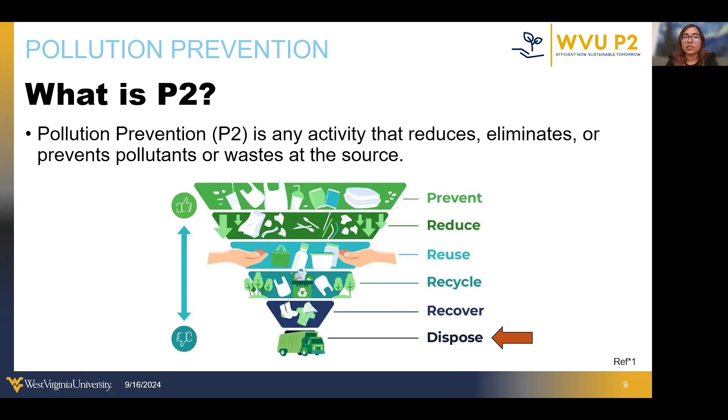When we talk about redesigning products as a method of pollution prevention, we are focusing on ways to fundamentally alter the design of a product to minimize waste and environmental impact. This can be achieved through several strategies. First, let's consider reducing material use in packaging. For example, in the food and beverage industry, companies can redesign their packaging to use less material, whether that means using thinner plastics or more efficient shapes. This not only reduces the amount of waste generated, but also lowers the cost of the material.

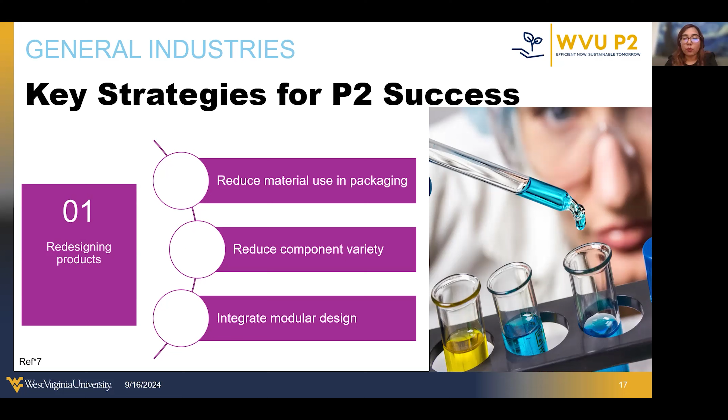For instance, in aerospace product and part manufacturing industry, companies can design parts that are modular, meaning they can be easily replaced or upgraded without needing to replace the entire product. This reduces waste and allows for more efficient use of materials over the product's life cycle.

Another crucial method for pollution prevention is choosing alternative input materials. This approach focuses on replacing conventional material with more sustainable and less harmful alternatives to reduce the environmental impact of manufacturing process. One example is to use alternative source of energy to supplement the grid. Companies can integrate renewable energy sources like solar or wind power into their operation, which reduces their reliance on fossil fuels, lowers greenhouse gas emissions, and can even reduce operational costs in the long term.

Another example is to use biodegradable materials. Companies can opt for packaging made from biodegradable materials instead of conventional plastics. This not only reduces the waste, but also minimizes the environmental impact when the packaging is finally discarded.

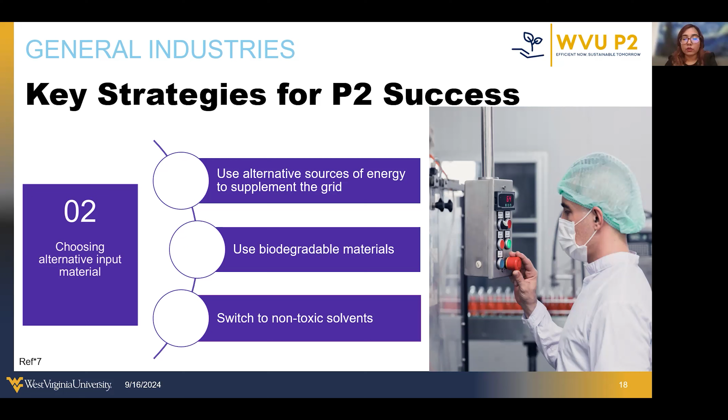And finally, switching to non-toxic solvent, which is another powerful strategy and can be heavily applicable in chemical manufacturing industry. Replacing traditional and hazardous solvent with non-toxic alternatives can significantly reduce the release of harmful chemicals into the environment and improve worker safety.

Another effective method of pollution prevention is switching to other equipment. This approach involves replacing or upgrading existing equipment with more efficient or environmentally friendly alternatives. One example is to install energy efficient motors. Upgrading to energy efficient motors can significantly reduce electricity consumption as it's a load driven device and lower greenhouse gas emissions. This not only helps with the environment, but also cuts down on energy cost for the company significantly.

Another example is to use airside economizer in HVAC system. This is relevant to any industry where climate control is crucial for maintaining the quality of the components. An airside economizer reduces the need for mechanical cooling by using the cooler outside air when conditions allow, leading to substantial energy savings.

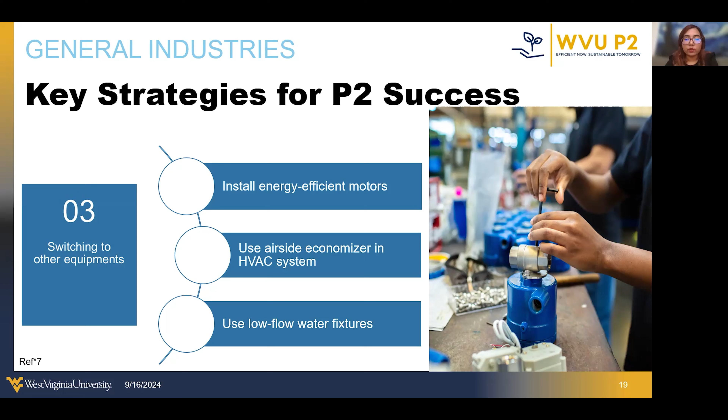And finally, using low-flow water fixtures is a simple yet effective way to reduce water usage, and this approach can be applied across various industries, including food and beverage manufacturing and processing. By reducing water flow, companies can lower their water bills and minimize their impact on local water resources.

Improving process monitoring is another key method of P2, and it involves closely tracking and managing the various processes within the facility to reduce waste and improve efficiency. One example is to implement continuous emission monitoring systems. CEMS can play a crucial role in tracking emissions in real time, allowing companies to quickly identify and address any issue that arises across the industries. This helps ensure compliance with environmental regulations and reduces the overall environmental impact.

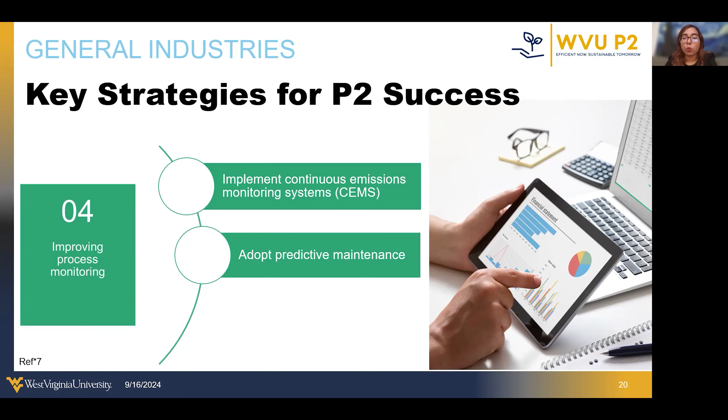Another example is to adopt predictive maintenance. This is particularly for many manufacturing industries. By using data and analytics to predict when equipment will need maintenance, companies can prevent unexpected breakdowns, reduce downtime, and avoid the waste associated with emergency repairs.

And lastly, regulating compressed air usage is a simple but effective way to improve efficiency. In automotive manufacturing, for example, compressed air systems are often a major source of energy consumption, and by carefully monitoring, regulating their usage, and assessing whether they're required or not, companies can reduce energy waste and lower operational cost.

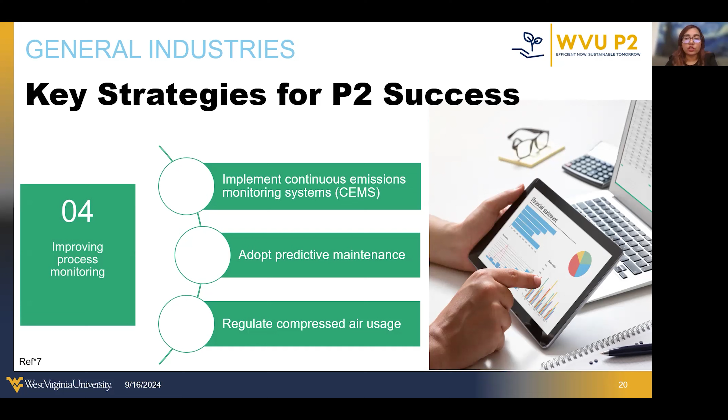And the last effective method for P2 is adjusting the concentration level of chemicals. This involves fine-tuning the amount of chemicals used in various processes to reduce waste and to minimize environmental impact. One example is to optimize chemical usage in cleaning process. Reducing the concentration of cleaning chemical can lead to less chemical waste, lower cost, and a reduced risk of harmful chemicals entering the environment.

Another example is to adjust the pesticide concentration in agriculture. Optimizing pesticide use can protect local ecosystems and water sources from contamination while still effectively managing pests. And finally, optimizing cooling water treatment is a crucial step in industries. By carefully controlling the concentration of treatment chemicals, companies can maintain the efficiency of their cooling system while minimizing chemical use and reducing the potential for environmental harm.

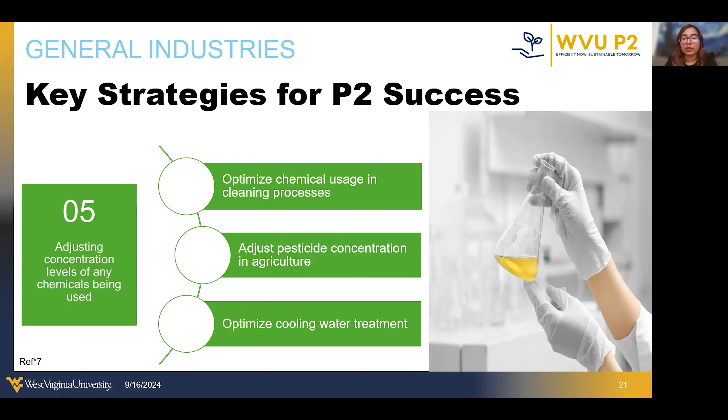While these methods I just described are key strategies for pollution prevention, it's important to remember that P2 is not limited to these approaches. Pollution prevention often requires us to think creatively and explore unconventional solutions. Sometimes the most effective strategies are the ones that aren't immediately obvious, and they might require us to challenge traditional thinking or to consider entirely new ways of doing things.

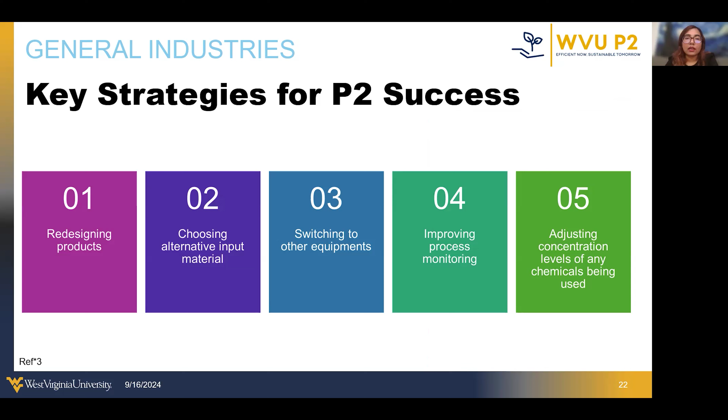But as many of you might find, it is impossible to connect all the dots this way. The solution only becomes clearer when we allow ourselves to break free from that conventional thinking, when we realize that nothing is stopping us from drawing the lines outside the perceived box. This is what we mean by thinking outside the box.

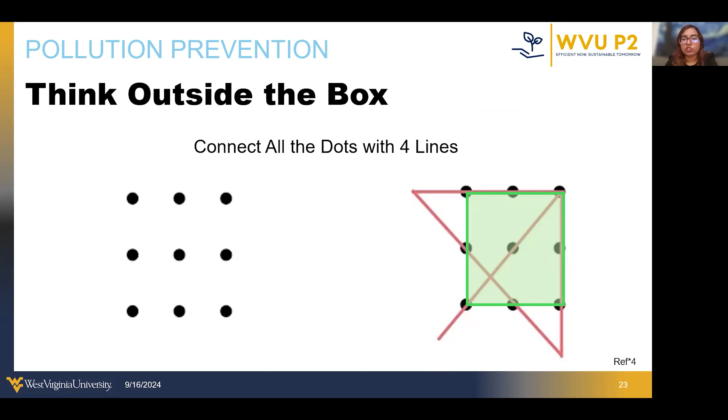And in pollution prevention, the most impactful solutions often require this kind of creative thinking. It is about pushing boundaries and challenging assumptions, finding innovative ways to reduce waste and minimize environmental impact. And now let me share with you a fascinating example of out-of-the-box thinking that truly embodies the spirit of P2.

In 2009, Google hired a team of 200 goats to mow the lawn at their Mountain View headquarters. Instead of using lawnmowers that emit pollution, Google decided to bring in these goats to graze and naturally trim the grass. Not only did this solution reduce emissions, but it also saved on fuel and maintenance costs associated with traditional lawn care equipment. Additionally, it provided natural fertilizer for the grounds and contributed to a healthier ecosystem.

Now let's briefly look over the 6 NEAs that have been prioritized by the P2 program before we jump into the NEA-specific recommendations or strategies. The first NEA is food and beverage manufacturing and processing. The second one is chemical manufacturing, processing, and formulation. Then we have automotive manufacturing and maintenance.

Next is aerospace product and parts manufacturing and maintenance. Then we have metal manufacturing and fabrication. And finally, we have supporting pollution prevention in Indian country and for Alaska Native villages.

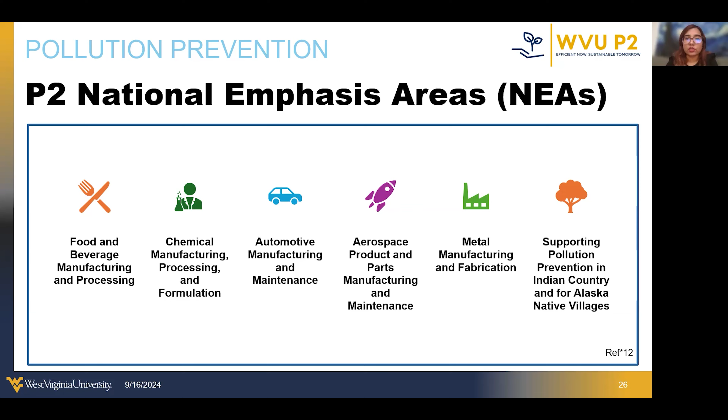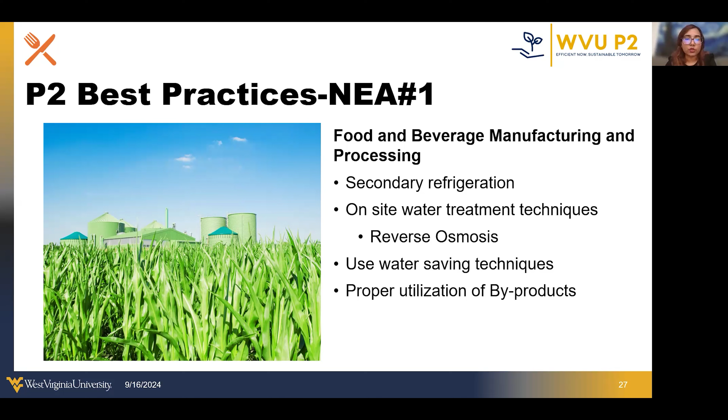So let's first jump into the P2 best practices for NEA 1, which is food and beverage manufacturing and processing. Here we have listed a few best practices, which we will explore and dive deeper into how they work and the benefits they bring to food and beverage manufacturing in the next few slides. But first, let's understand how important refrigeration is for the food and beverage industry.

Refrigeration is crucial for the food and beverage industry, which heavily relies on temperature control to ensure quality and safety. Here are 4 points we have listed on why it is so important for this particular NEA. The first is, in the food and beverage industry, maintaining controlled temperature is essential to extending the shelf life of perishable goods. Proper refrigeration helps prevent spoilage and contamination, ensuring products reach consumers safely and with optimal quality.

Many processes in food production, such as fermentation, chilling, and freezing, require precise temperature control. Effective refrigeration ensures that these processes occur within the correct parameters, safeguarding both product quality and safety. Given the energy-intensive nature of refrigeration in the industry, optimizing the systems can vastly improve overall operational efficiency.

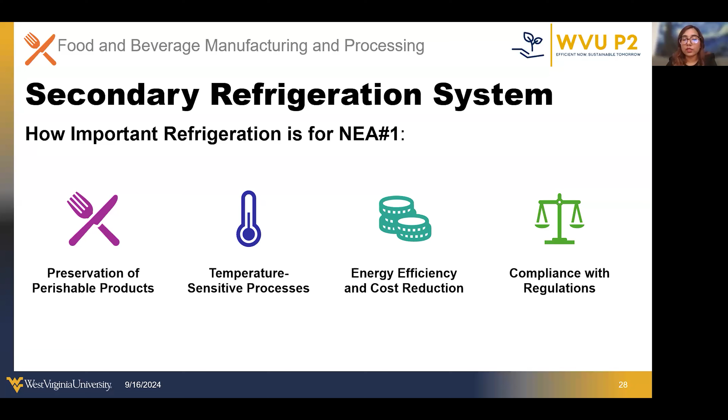And finally, food safety regulations require stringent temperature controls throughout the supply chain, and reliable refrigeration systems are key to meeting food safety standards, reducing the risk of non-compliance and ensuring consumers' safety. So one of the solutions is using a secondary refrigeration system, which is an effective solution to minimize the use of hazardous chemicals while maintaining a safe and efficient cooling process.

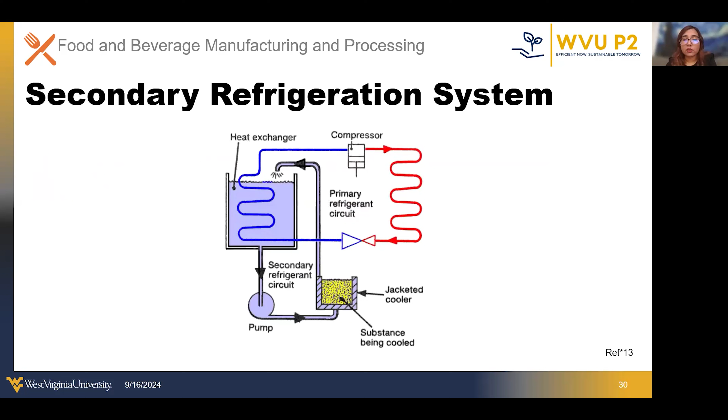So let's have a better look at how this process works. The process begins with the compressor, which circulates the primary refrigerant through the primary circuit, and the refrigerant cools down the heat exchanger. But here is a catch. This is risky because the primary refrigerant, such as ammonia, is toxic and can be dangerous if it leaks. Imagine an ammonia leak in a meat processing plant; this could result in product contamination, create a hazard for the workers, and cause significant downtime.

Primary systems also operate under high pressure, increasing the likelihood of leaks or equipment failure, which is something food and beverage processing companies must be cautious about given the stringent health regulations they face. Now, there comes the secondary refrigerant, which absorbs the cold from the heat exchanger and is distributed throughout the plant, cooling equipment and product efficiently.

The jacketed cooler you see there ensures that the target substance, whether it's a product or a piece of equipment, is cooled safely, preventing any contact with the primary, more hazardous refrigerant. So this is why a secondary refrigerant system is better: the primary refrigerant, like ammonia, is kept confined in a small controlled area of the plant, such as the machine room, and this means the hazardous chemicals are not spread throughout the production areas, reducing the risk and exposure.

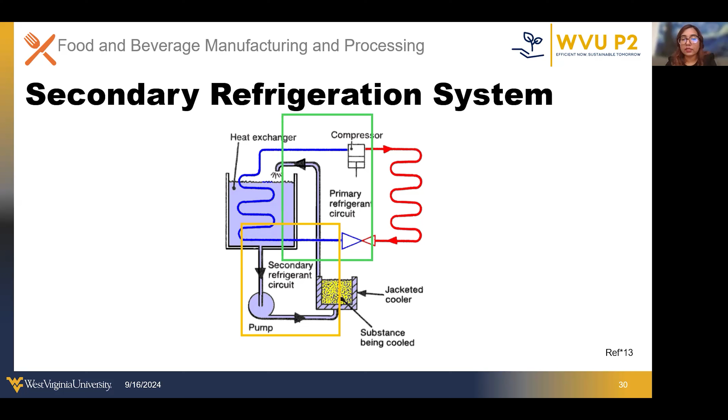So let's take a closer look at the benefits of using a secondary refrigeration system. First of all, it reduces harmful refrigerants, one of the key advantages of using this secondary refrigeration. Next, it improves safety, as we discussed in the previous slide: it can prevent spills through the storage, or prevent any contact with the workers or the food.

Next benefit is it is an isolated refrigerant, which is the design of the system ensures that the main refrigerant stays confined within a specific controlled area, which is usually the machine room and the condenser, while a safer secondary refrigeration circuit circulates throughout the plant.

And finally, it is cost effective. Not only does the system improve safety and efficiency, but it is also cost effective, as the safer operation leads to lower maintenance cost, and the reduced need for refrigerant top-ups minimizes ongoing operational expenses.

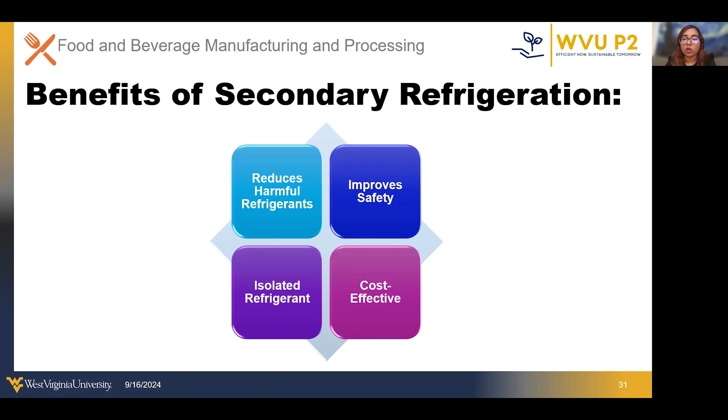All right, so now we will discuss another best practice that this particular industry can consider, which is on-site water treatment techniques. In a lot of these food processing companies or manufacturing units, boilers are essential in the food and beverage industry, providing steam for key processes like sterilizing equipment, pasteurizing products, and supporting cooking and cleaning operations, ensuring the boiler runs efficiently and helps maintain high production quality while minimizing energy consumption.

And one of the very important steps here is the makeup water, which is added to replace water lost during steam production, and plays a critical role in boiler efficiency. Maintaining high water quality is necessary to ensure the boiler operates effectively, avoids scale buildup and ensures consistent steam output.

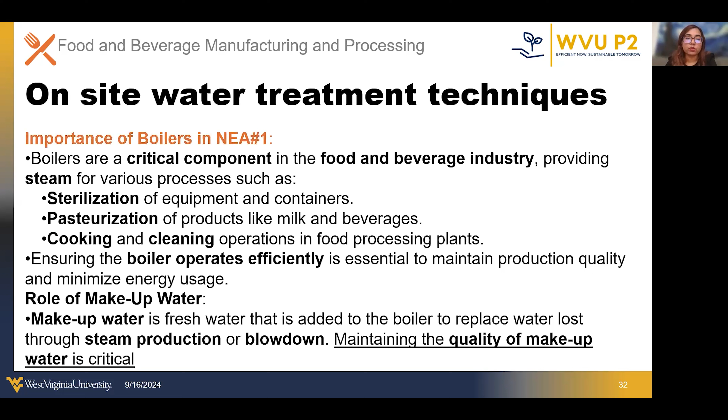Now, here is a closer look at reverse osmosis, which is an incredibly effective method for reducing total dissolved solids, or TDS, in boiler makeup water, especially in closed loop heating systems. So let's go over why this is a key practice in the food and beverage industry and how it works. Here is the diagram of reverse osmosis, and I will walk you through how RO works and then discuss how it directly benefits the makeup water used in the boiler system.

So the first step is, before water enters the RO system, it goes through a pre-treatment stage. Here, large contaminants like sediments, chlorine, and other impurities are removed to prevent clogging or damage to the RO membrane. This step ensures that the membrane can focus on filtering smaller and dissolved solids.

In the next step, as you can see here, the core of the RO process is the semi-permeable membrane, and water is pushed through this membrane under pressure. Water molecules pass through, leaving behind TDS, including salts, minerals and organic contaminants. The clean water that passes through is known as permeate, while the remaining water with concentrated impurities is called reject. So you might be thinking, what is this semi-permeable membrane and how does it work?

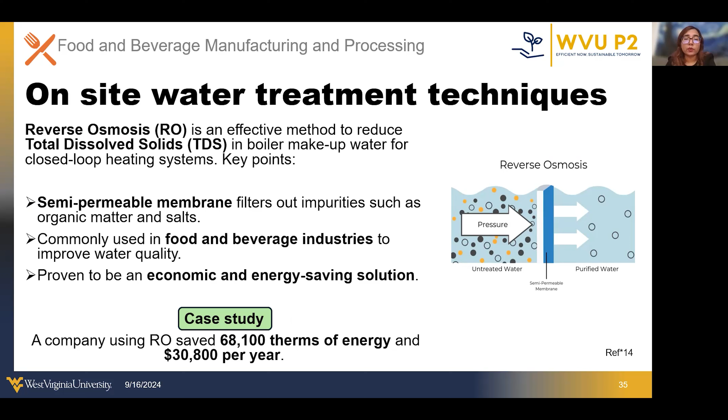So as you can see, RO is not only effective but also cost efficient, as it is an energy saving solution that can significantly reduce the operational cost of the boiler over time. For instance, in one case study, a company using RO technology saved an impressive 68,000 therms of energy and more than $30,000 per year. This demonstrates that beyond its environmental benefit, RO can also result in substantial financial savings, as it helps with the boiler makeup water, which helps to keep the boiler scale free.

And here are a few other techniques to save water in the facility, used throughout food and beverage manufacturing units or businesses. I'm not going over them one by one due to the shortage of time, but they include reuse of final rinse water, reuse of scrubber water, reuse of brine, considering low flow faucets and aerators, and regular inspection to keep an eye out for leakages and waterline spillage.

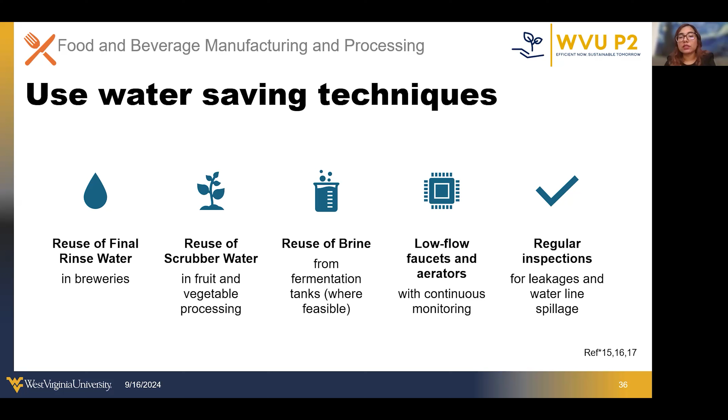Next, we have another recommendation for this particular industry, which is utilization of byproducts. We have listed many points here suggesting extracting valuable compounds from different byproducts, such as mango peels and tomato byproducts, looking for ways to convert food processing leftovers to repurpose them, such as animal feed, and looking for opportunities to partner with specialized industries to extract useful byproducts if in-house extraction or repurposing is not feasible. But here I want to slip in one of my personal experiences.

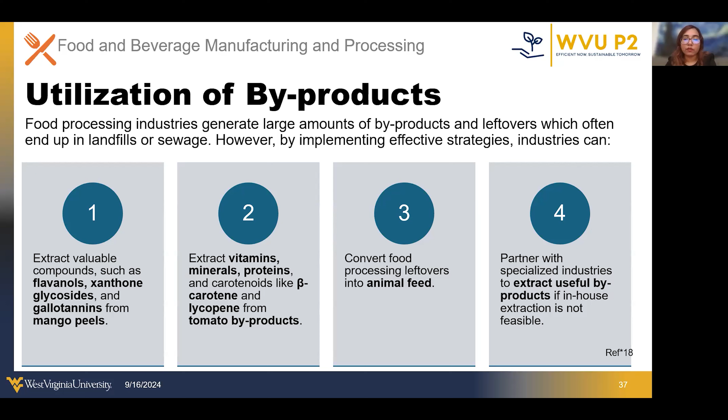This is when I was working with a manufacturing company, and we implemented a byproduct management strategy that truly revolutionized our production line. We were able to repurpose byproduct as an additive material in the production process, which ultimately replaced a significant amount of raw material. Not only did this save us a substantial amount of money, but it also contributed to the company's ESG goals by reducing waste and enhancing sustainability. It was a great example of how a smart, well-planned strategy can turn a challenge into a benefit.

And next, we will talk about our NEA2, which is chemical manufacturing, processing, and formulation industries. Here we will talk about the implementation of proper chemical storing practices and transfer plans, and how optimizing reaction conditions can help with reducing the release of toxic chemicals, very briefly.

So these are the list of some best practices, or the things we can keep an eye out for to ensure that we are doing proper chemical storing. So the first one is classifying and storing incompatible chemicals separately. And next, we can consider maintaining environmental conditions such as temperature and humidity. We should also label containers properly and replace damaged labels immediately if the situation occurs. And we should also consider storing unused chemicals in separate containers to avoid

contamination. And also, we encourage to perform routine checks of storage conditions and avoid exposure to sunlight, water leaks, and mechanical or electric shocks, because sometimes exposure to any of this can compromise the integrity of the chemicals, making them dangerous to handle or even causing hazardous reactions.

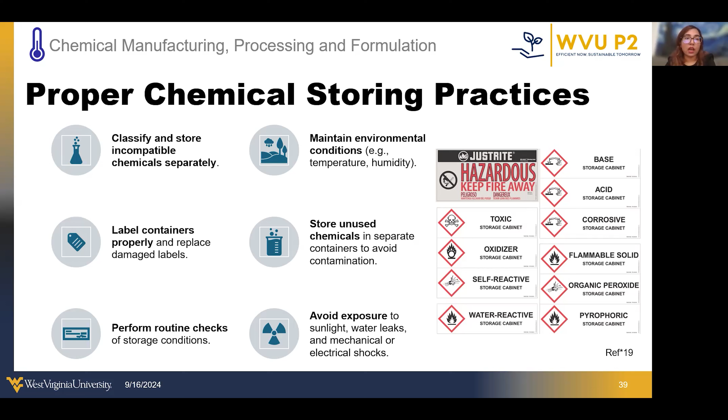Next, we have some suggestions for preparing proper chemical transfer plans, which includes maintaining proper environmental conditions during transfer, providing training to employees handling chemicals, using automated dispensing systems to reduce manual handling, and using drip pans to prevent spills.

And this is very important, and we can look for ways to integrate this to various transfer processes, as drip pans should be placed under the transfer points to catch spills and prevent hazardous chemicals from contaminating the work area. And this simple practice can help contain small spills and make cleanup faster and safer as well.

And as some more suggestions we have, ensuring filtered air into the transfer area before exhaust, using pre-weighed sealed containers when possible, cleaning transferring containers properly before using, and conducting safety drills to ensure employee safety so that they learn about how to react quickly and safely in real situations.

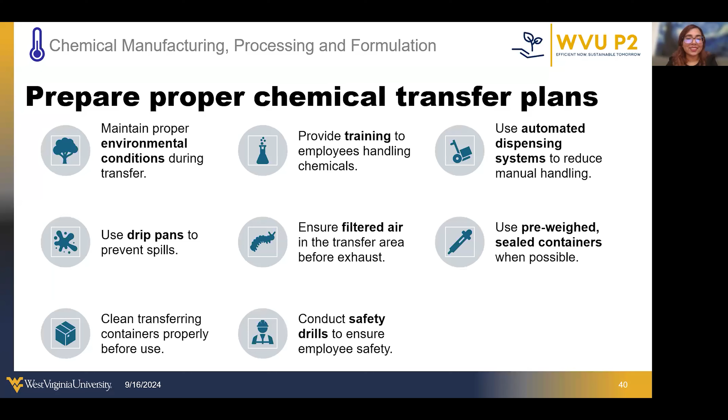Next, another suggestion for this particular industry is optimizing to reduce the releases of TRI. So when working with chemical processes, the byproducts generated largely depend on the conditions under which the reaction occurs, which includes temperature, pressure, catalyst, reactant concentration, and quality.

And the key focus should be maintained on optimizing reaction conditions, which is not a one-time task. It requires continuous research to find the best temperature, pressure, catalyst, and other factors that lead to cleaner and more efficient reaction. And the goal is always to find conditions that either reduce or completely eliminate toxic byproducts.

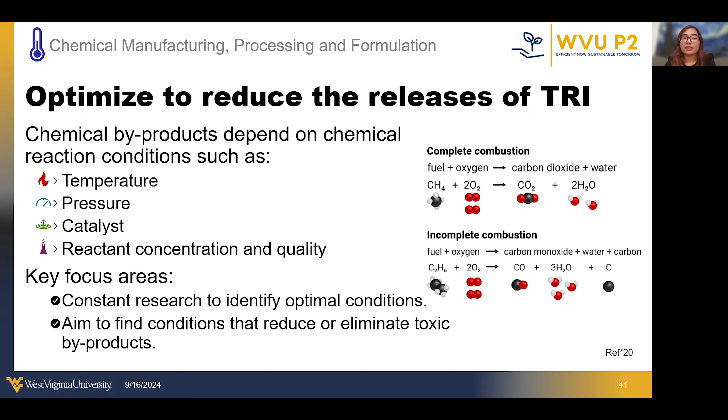And cleaner chemical processes benefit both environment and the company by reducing waste, minimizing hazards, and lowering cost associated with waste disposal. So we hope that these practices can help with the overall situation.

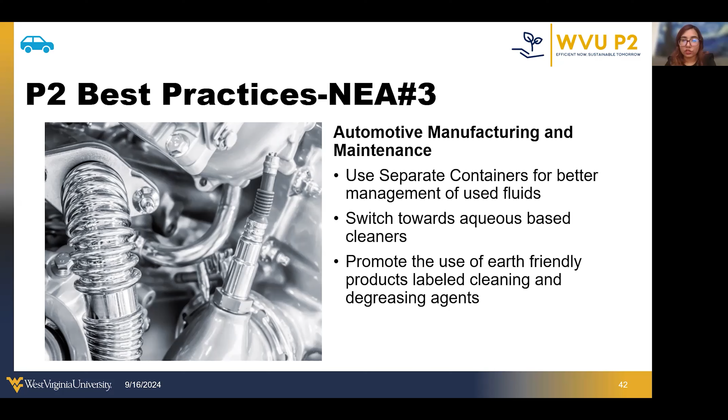And next, we have another NEA, which is automotive manufacturing and maintenance. So here we have a list of suggestions, which includes using separate containers for better management of used fluids, switching towards aqueous-based cleaners, and promoting the use of earth-friendly labeled cleaning and degreasing agents. So first is considering separate containers for used fluids.

In the automotive industry, various fluids are used, each with its own properties, hazards, and specific disposal requirements. So let's review some of the most common types of fluids, which are antifreeze, brake fluids, engine oil, transmission fluid, and windshield fluid. And the key consideration is that because each of these fluids has different properties, they also require a specific disposal method.

Some are flammable, while others can be toxic or corrosive. Knowing how to handle and dispose of these fluids properly is essential for safety and environmental protection. One critical point is that mixing fluids can complicate disposal. When fluids are mixed, they often need to be treated as hazardous material, even if some of the original fluids were not hazardous by themselves. So that may increase the disposal cost as well.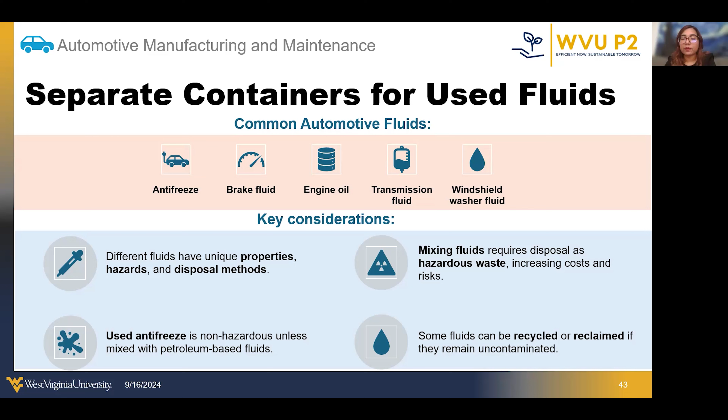For example, used antifreeze is generally considered non-hazardous, but if it is mixed with oil or other petroleum-based fluids, it must be treated as hazardous waste. And another consideration is that many of these fluids can be recycled or reclaimed if they are not contaminated. For example, clean antifreeze can be reused or filtered for future use, and engine oil can be recycled into new products. However, this is only possible if we keep these fluids separate and uncontaminated.

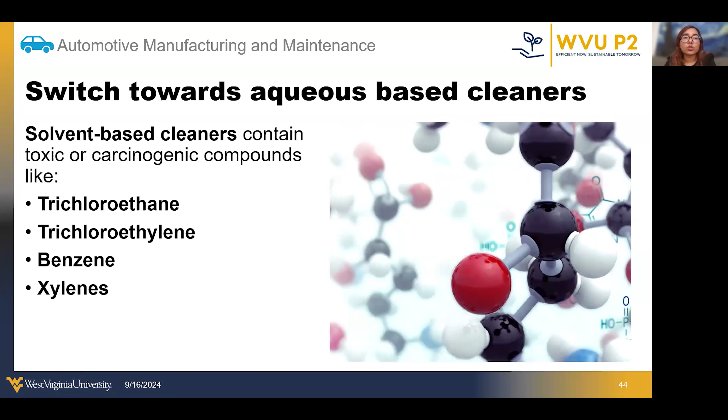So here is another strategy for the automotive industry, which is switching towards aqueous-based cleaners. Many solvent-based cleaners used in industry applications contain hazardous compounds like trichloroethane, trichloroethylene, benzene, and xylenes. And these chemicals are either toxic, carcinogenic, or both in nature.

So here, some of the key considerations should be that the cost of disposing of solvent-based cleaners is generally higher due to their hazardous nature, specialized disposal methods and facilities are required for these toxic chemicals, leading to increased cost. In contrast, water-based cleaners are much easier and cheaper to dispose of, making them a more cost-effective option in the long run.

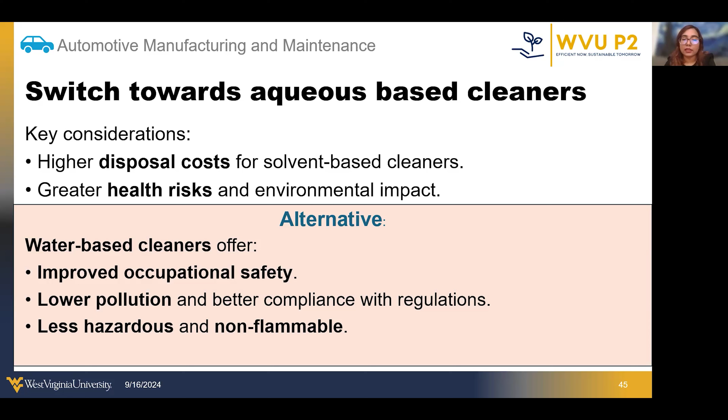And another consideration is improving occupational safety by reducing exposure to toxic and carcinogenic substances. Water-based cleaner significantly improves occupational safety. It lowers the pollution and goes along with compliance with the regulations. And also it is less hazardous and non-flammable in nature.

And another strategy for this particular industry can be promoting earth-friendly or eco-friendly brake cleaning or degreasing agents in the workshop, which are environmentally friendly and sustainable, are safer for workers to handle, clean parts without compromising quality, and are cost-effective in the long run.

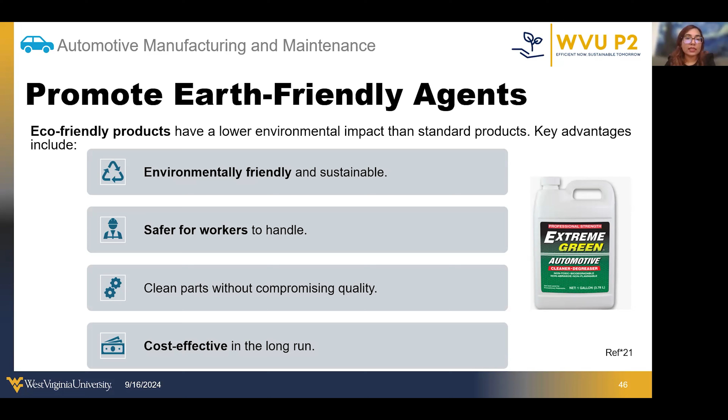Next, we have our NEA 4, which is for aerospace products, parts manufacturing, and maintenance. Here we are going to talk about how using non-hazardous sealant removers and Green Seal certified products can help with implementing the P2 best practices.

So in aerospace applications, maintaining and repairing parts often requires the removal of sealants like polysulfide and polythioether. These sealants are critical for ensuring the integrity of the components, but the solvents used to remove them are often highly toxic, and sometimes include toluene, methylene chloride, and N-propyl bromide, which can cause headaches, dizziness, and long-term exposure risks, including cancer, and they are often linked to neurotoxicity and other harmful health effects.

And the solution can be going for safer alternatives by replacing hazardous removers with safer alternatives like PolyGone 310-Ag, Diestone DL, Skyleen 1000, and these will provide more toxin-free alternatives while maintaining the performance.

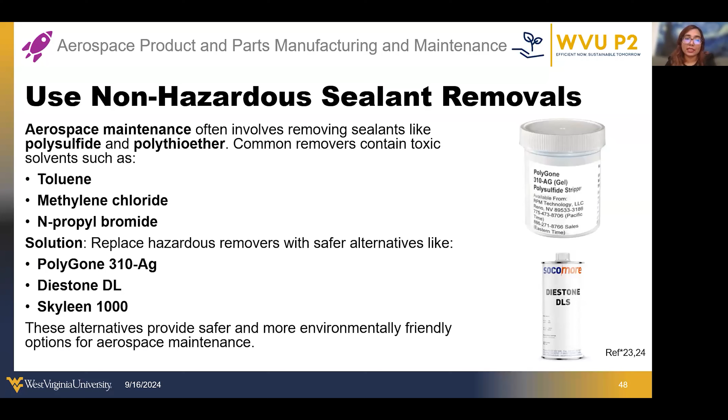And another suggestion is checking out Green Seal's website. They are a nonprofit organization known for developing rigorous standards to ensure sustainability and safety of products. And their standards include GS 36, GS 43, and 34 for adhesives, paints, cleaning and degreasing agents, respectively.

And if we replace some of these currently used products with GS certified products, that can help us in maintaining low toxicity, as they contain no restricted hazardous substances, and they have low VOC content as well, which makes them cleaner and healthier choices for the indoor environment.

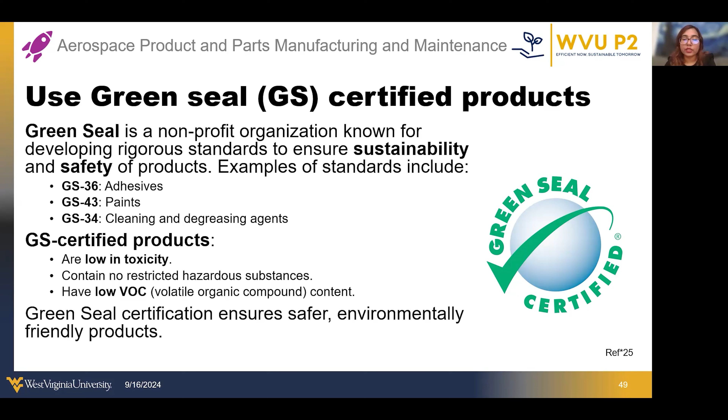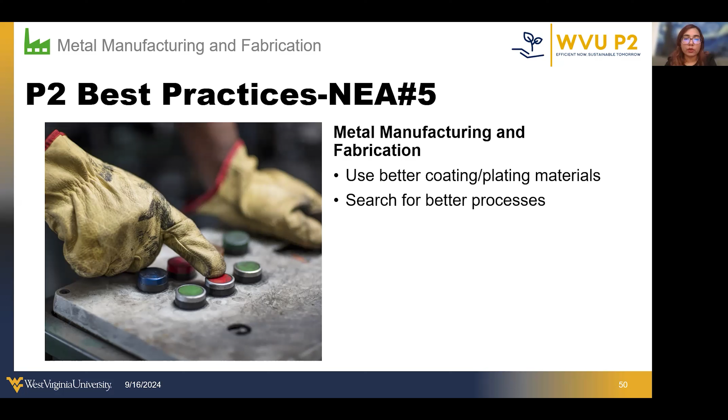And finally, our last NEA is metal manufacturing and fabrication. Here we can pay closer attention to using better coating and plating materials and searching for better processes. As an example, jet vapor deposition, chemical vapor deposition, and electroplating all provide the same level of service in terms of metal coating.

And if we take a closer look at how these processes work, then we would be able to find a better alternative and understand which processes we should go for from an environmental perspective. So let's start with JVD.

JVD is a physical vapor deposition technique where metal wire like aluminum or titanium is heated and evaporated into a stream of atoms using a high velocity sonic inert gas jet, often argon or nitrogen. These evaporated atoms are deposited onto the substrate in a uniform thin coating. The gas jet helps control the thickness and adhesion of the coating, which can range from thin films to thicker layers.

JVD works at lower temperature compared to CVD, making it ideal for substrates that are sensitive to heat, like plastics or alloys. The process chamber contains the substrate, which is held under vacuum conditions to prevent contamination during the deposition.

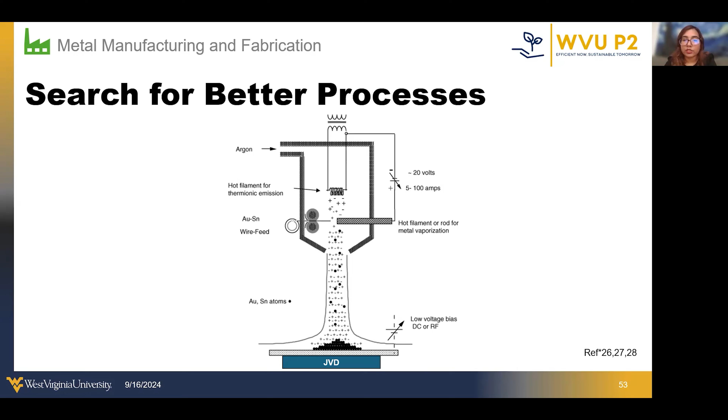Next, another comparable method is CVD or chemical vapor deposition. In the CVD process, reactive gases like silane, methane, or hydrogen are introduced into the chamber containing the substrate. At higher temperature, these gases react or decompose to form a solid layer of material on the surface of the substrate, often used to create metal coatings, ceramics, or semiconductors.

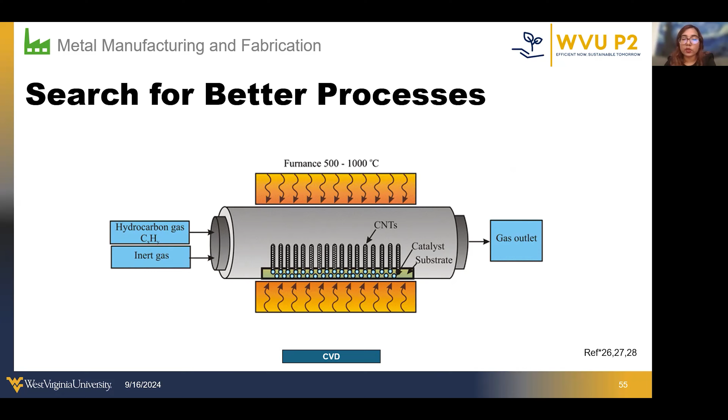CVD involves a chemical reaction that deposits materials, but it also releases toxic gases and byproducts that can be harmful to the environment and require significant waste management.

And another comparable method is electroplating, and we all know about this process. It involves placing the substrate in a solution containing metal ions such as nickel, copper, or chromium, and applying an electric current. This causes metal ions to deposit onto the substrate, creating a metal coating. And it's often used to improve corrosion resistance, wear protection, and for aesthetic purposes such as chrome plating.

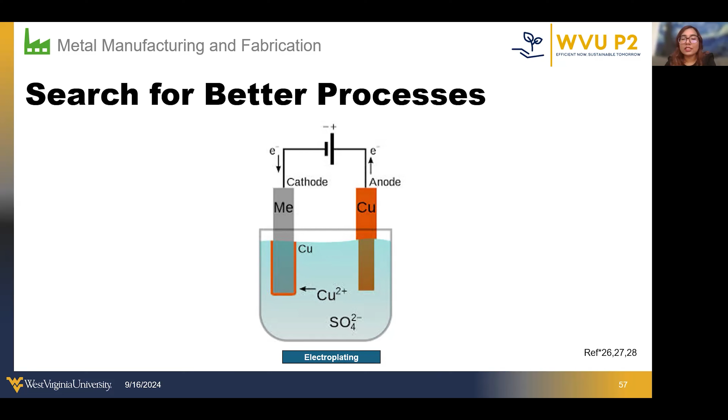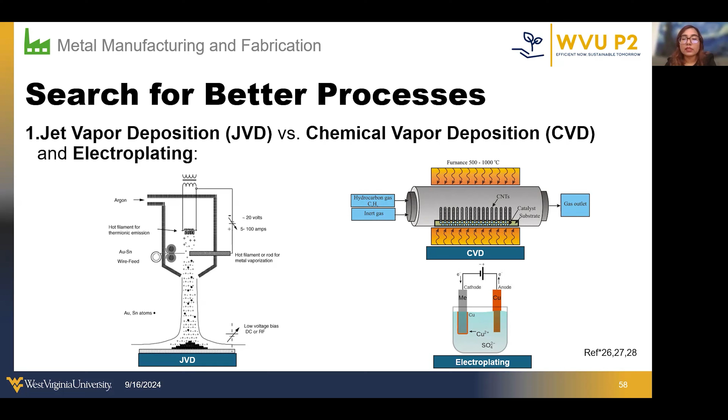However, this process uses toxic electrolytes and produces significant amounts of hazardous waste and heavy metals, which need to be carefully managed. And all three processes, JVD, CVD, and electroplating, are extensively used in the metal manufacturing and fabrication industry to coat metal components, improve surface properties, and enhance performance.

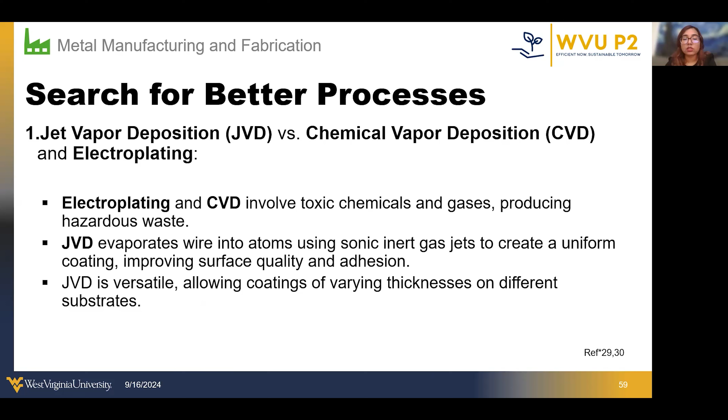So from a P2 perspective, JVD stands out as the better option as it avoids the toxic chemicals and waste produced by electroplating and CVD, offering a cleaner and more sustainable method for coating metals. Another best practice for sheet metal fabrication particularly is nesting designs.

Nesting involves positioning different parts and shapes, or components, onto the flat sheet of metal in such a way that the space between the parts is minimized. The goal is to fit as many parts as possible into a single sheet of metal with the least amount of scrap material or waste left over after the cutting process.

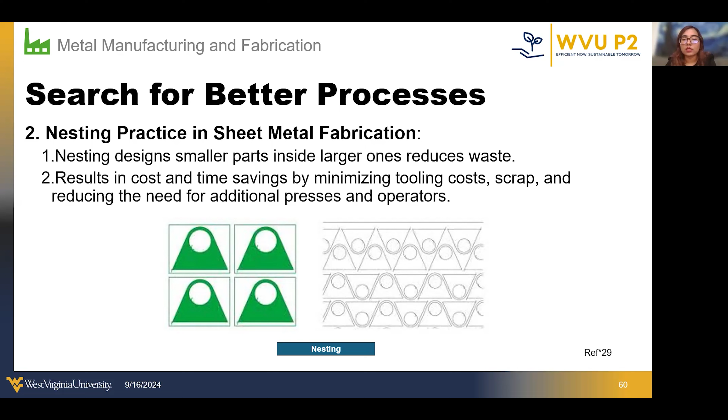If you look at this diagram, you can see how different shapes or parts are arranged on sheet metal. The outer boundaries represent the dimension of the sheet, and the shapes inside are the components that need to be cut out. In efficient nesting, the parts are placed as closely as possible, almost like fitting together puzzle pieces, leaving minimal gaps or unused spaces between them.

Another suggestion for this particular NEA is using better coating and plating materials. We have discussed two alternatives: substituting hexavalent chromium with trivalent chromium and replacing xylene with Oxsol 100 in steel coating. Hexavalent chromium has been widely used in metal finishing, chrome plating, and anti-corrosion coating, and it provides high durability and an effective barrier against corrosion.

However, from the environmentally friendly perspective, we can look at this replacement, which is less hazardous for the environment. In terms of cost, it might be a bit more costly, but it depends on what the organization is looking for. If they're looking to meet their ESG goals or agenda, then maybe this project can be justified for them financially. Same thing for replacing xylene with Oxsol 100, which gives a better and safer option to replace the heavily used xylene.

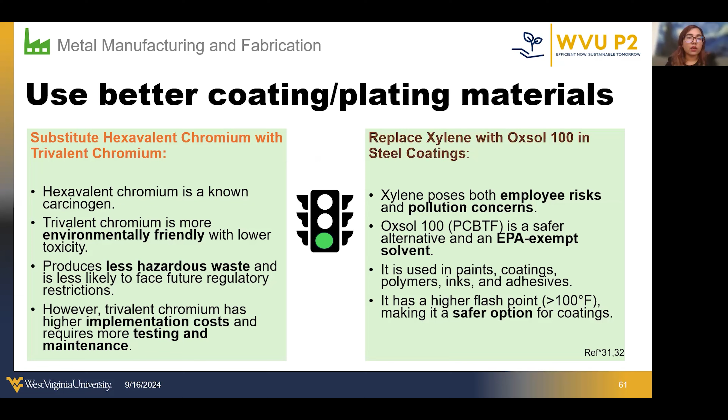So as we have discussed different strategies we have picked for different NEAs, let's briefly talk about the tools and resources on EPA's websites that we can use for tracking or understanding P2 practices better. The first one is the P2 calculator. These calculators are essential for accurately estimating the environmental and economic impact of pollution prevention examples we are looking to implement. So this is a great tool.

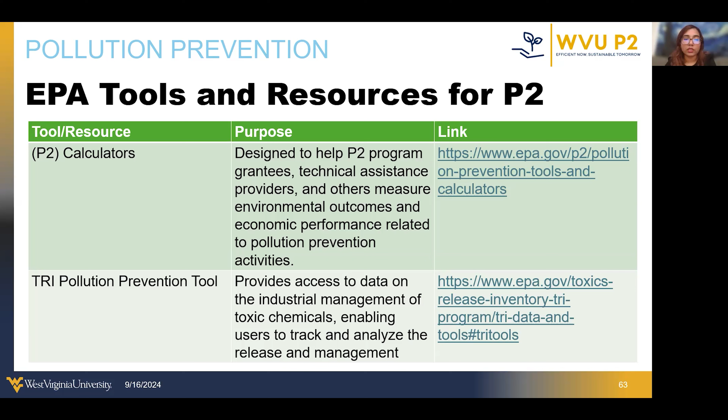Then we have the TRI pollution prevention tool, which provides access to data on industrial management of toxic chemicals, enabling users to track and analyze the release and management. Next, we have green chemistry tools and Safer Choice standard and criteria, which are very similar. These provide resources to help businesses develop safer chemical choices and processes, while Safer Choice standards guide businesses in choosing the right alternative in terms of cleaning agents or antiseptic agents.

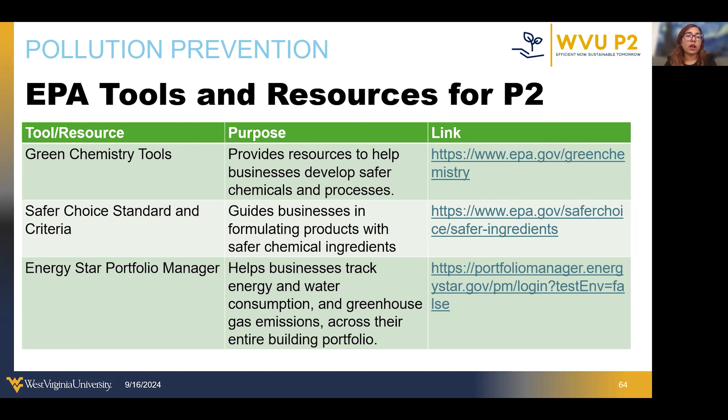Next, we have the Energy Star Portfolio Manager, which is a great free tool that helps businesses track energy and water consumption and greenhouse gas emissions, which are sometimes key metrics to understand where your P2 implementation is going and how the project is performing. In that case, this particular tool can serve as a great tool for tracking.

So in conclusion, as we wrap up, let's briefly recap the key points. We first covered the general industry P2 strategies, which are flexible and can be applied across different sectors to help reduce waste, save resources, and support sustainability goals. Next, we discussed NAICS-specific P2 strategies, which are tailored to specific industries. These targeted approaches offer opportunities to optimize processes and reapply effective pollution prevention methods across the board.

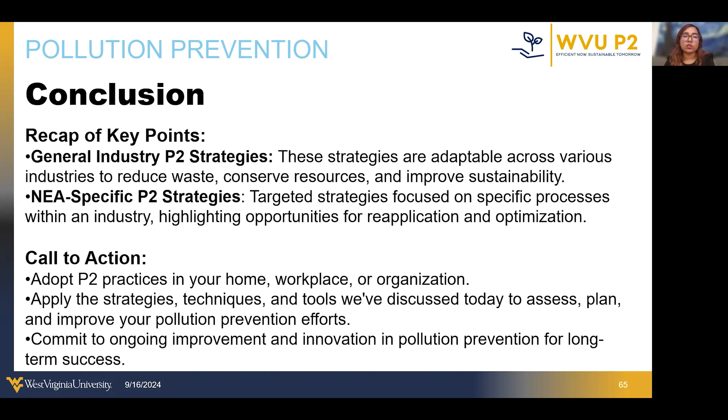As a call to action, I encourage you to adopt P2 practices whenever possible in your home, workplace, or organization. Use these tools and strategies we have discussed today to assess, plan, and improve your pollution prevention efforts. And as we were talking about, these are not strategies that are one size fits all, and that's where we come into play.